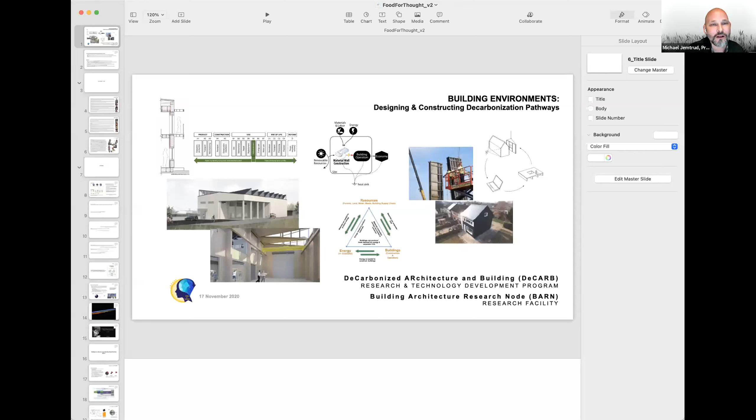Everyone hear me? Good. So I'll just start the screen share, I guess, right away. There we are. So is that good? Everyone see that? Looks good. Yeah.

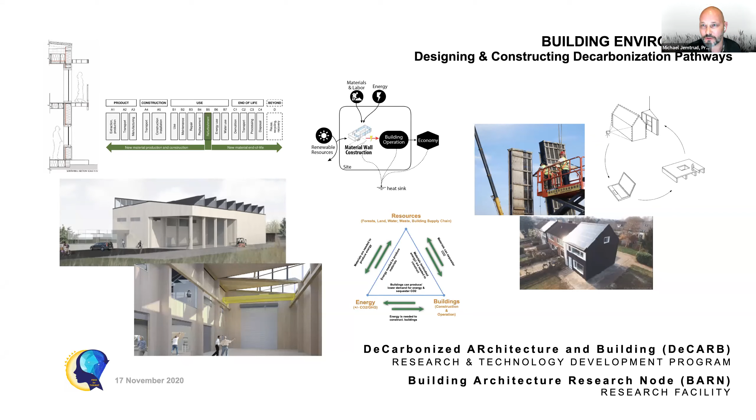Excuse me. Well, thank you. This is really a pleasure, crossing faculty, something I've been looking forward to for a very long time. I'm in the School of Architecture, which is in the Faculty of Engineering. I've been working with Grant now for about a year, trying to set up some tangible research projects and initiatives out at the MAC campus, some of which I'll talk about tonight. So let's just get right into it.

What I am going to talk about tonight is three intertwined initiatives. There's the DeCARB research program, which is the blanket research program we have within the School of Architecture now, involving quite a few faculty members that I'll show later. It's housed in the School of Architecture, but it's meant to be interfaculty, interinstitutional, and involve quite a lot of industry partners as well.

The second related theme, which falls within the DeCARB program, is the Quebec Building Energy Retrofit program, a research program that I'm applying for right now. It started as a Hydro-Quebec Industry Research Chair proposal, but since the granting programs have changed quite a bit, it's taken a new twist. I'm still working on that, but I hope to submit it by the end of the term.

The third initiative, which ties into all of this, is a large CFI grant, Canadian Foundation for Innovation grant, to build a new building out at MAC campus called the Building Architecture Research Node, which I will speak about. Collectively, the big question for all of us is trying to have a holistic consideration of the global warming potential of the entire building environments process.

I say building environments process instead of architecture or engineering because it's a verb and a noun. So it is about buildings, of course, but it's also the entire process that we go through to build a building, a community, a landscape, or anything that involves the built world.

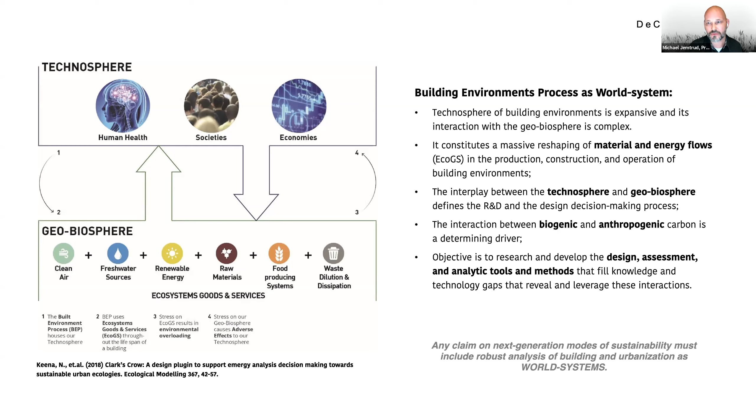Like I said, we have a great interest in wood and biogenic carbon related systems and issues, but it's not only limited to that. So it's an interdisciplinary and transcalar approach. We have people from Elena Bennett looking at huge ecosystem services, and Rosetta Elkin looking at coastal resilience strategies, and Nick Luca looking at communities, all the way down to Sal looking at very specific building techniques and technologies. And we're really trying to fill the knowledge and technology gaps that we see in the architectural engineering construction industry.

One of the big points is that we've recognized all the different levels of uneven exchange, whether it be ecological, economic, or even in the metabolic rifts in the systems. And again, as I said before, we're very concerned about how a lot of these issues are routinely externalized in the research and design of buildings and urbanization. These enabling externalizations are directly responsible for a lot of environmental and social degradations around the world. I'll speak a bit about that later. So we're looking to expand our typical disciplinary system boundary as well into other disciplines, into other areas and at much larger scales.

I already said that we're looking to develop the kind of technologies and knowledge, epistemological structures around the gaps that we see in the industry. So it's all about this sort of interaction between resources, energy, and building, and that it's always a bi-directional flow of these things, and they get intertwined in very complex ways. But we truly do believe that Canada, and particularly Quebec, is poised to achieve low to carbon negative modes of living if we can effectively integrate this range of necessary flow systems and carbon cycles.

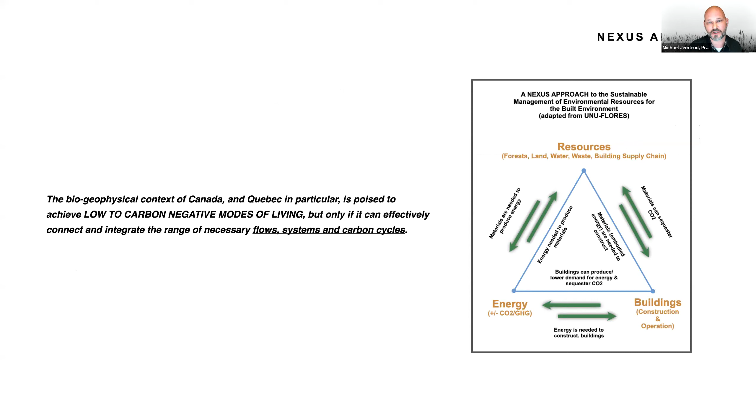One example of that, for instance, is the global warming potential of some of the greenhouse gases that we're talking about. So this one in particular, sulfur hexafluoride, has a global warming potential of 22,800 times greater than carbon dioxide.

So this is a component, a man-made component used a lot in electrical insulators for substations and semiconductors and such. As I work a lot with Hydro-Quebec, and as we in Quebec electrify everything, we think this is a great thing, but there's a lot of negative feedback loops that come with that. One of the main ones is that this compound is hugely damaging to the atmosphere. The more we electrify, we might be saving carbon equivalents on certain levels, but this one is really exacerbating another level of that.

Other examples we see in our own supply chain, for instance, is sand. There's a global crisis in sand right now, and that has to do with concrete. For instance, China used more concrete in the first 3 years of this century than the United States did in the entire 20th century. So there's literally a sand shortage. There's a mafia around sand, and people are dying because of it. The sea around North Korea is having huge degradation problems.

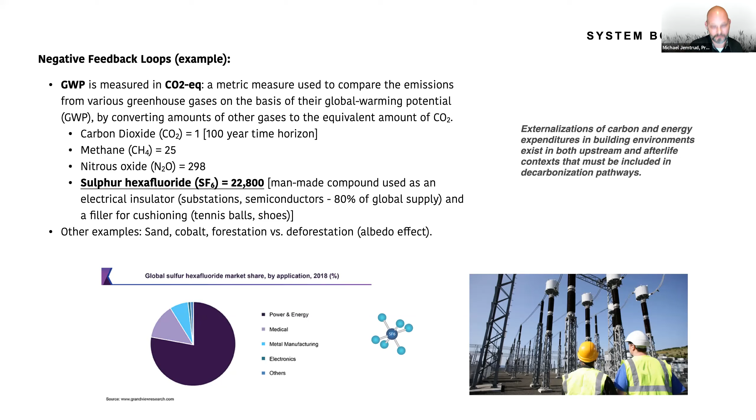So what we're really talking about is this very thin layer of the atmosphere around the Earth that we have to locate architecture in. And it reminds me of a saying from my favorite artist, Tom Waits, when he was inducted into the Rock and Roll Hall of Fame. He said songs are really just very interesting things to be doing with air. So I've kind of taken that to heart, and buildings are really just a very interesting thing to be doing with air.

I think it's an important mental shift to make for our students, for the profession at large, that although it's very concrete, we're dealing with social issues and things like that, there's these externalized effects that we have to be more aware of. And we need to have that kind of mental paradigm shift in order to think that way. So I'm going to go through this next section a little quicker because I think this is probably familiar to a lot of people.

We're really looking at carbon critical building environment process solutions. As you probably know, architecture, or buildings, are responsible for a huge amount of global emissions, and that's operational emissions. But even more importantly, as we get better with energy efficiency and electrification, particularly in Quebec because we have hydroelectric power, the embodied emissions in a building and in the whole process is even more important. A typical building actually over its lifetime has more embodied carbon and energy emissions than it does operational ones.

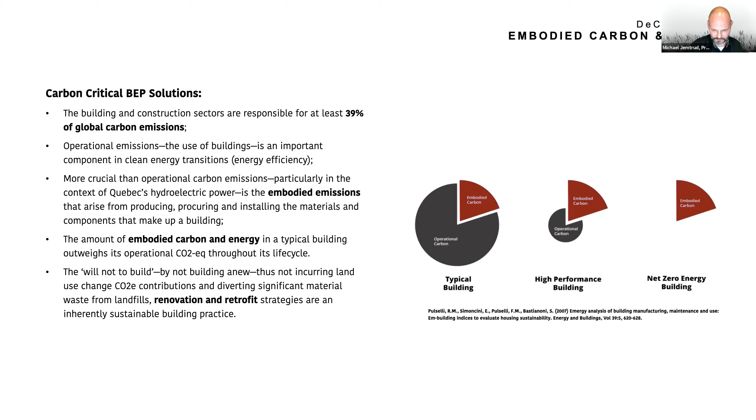So how do we expand the system boundary? Well, this is a typical life cycle analysis kind of diagram. My colleagues like Naomi Keena and Sal and Kiel Moe have developed some techniques and methods that actually expand that system boundary and look at the actual work of the geobiosphere. So through emergy analysis, they understand how much energy it took to grow a tree. And then it goes all the way to the other end, where it's looking at capital and human resource expenditures and energies.

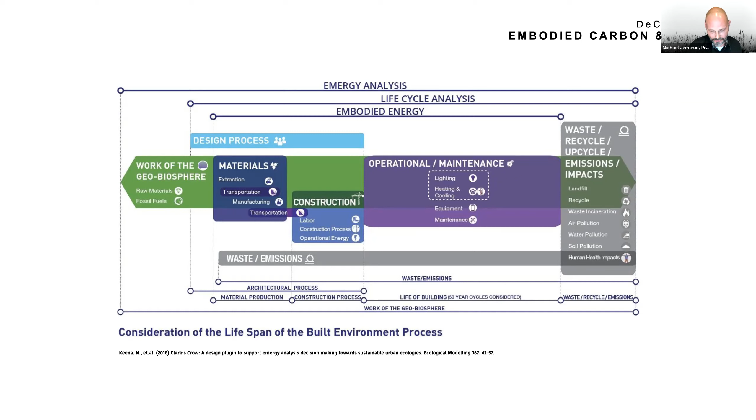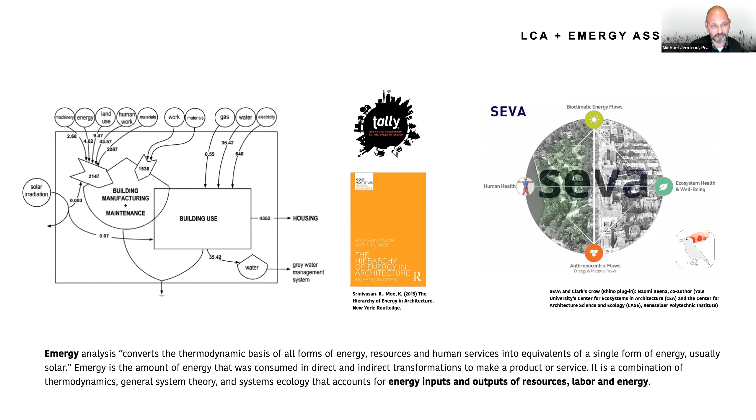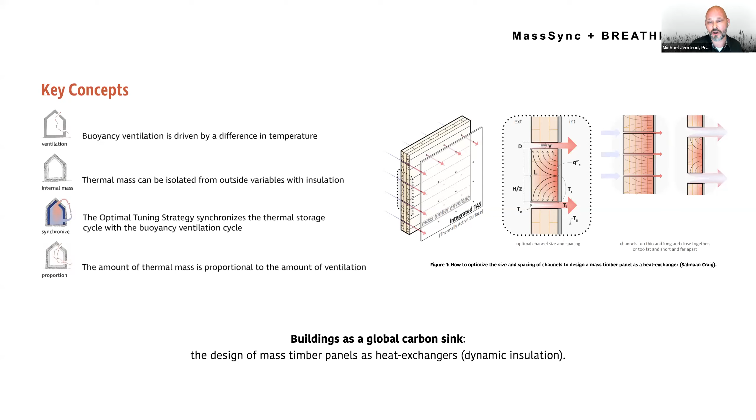Salmaan Craig, amazing engineer, crossover engineer to architecture, which is actually quite rare. He's working on all wood constructions, along with tuning that with passive ventilation techniques. He's found a way to use all wood wall construction to behave at passive house levels of performance, really high performance enclosures, but they're all wood assemblies. So there's none of the other membranes and things with high carbon content. He's doing this with something that sequesters carbon instead, so he's looking at buildings as a global carbon sink, which would be a complete game changer in the industry.

I show this because we're actually prototyping some of his technologies at a collaborating institution, Auburn University. They have a group called the Rural Studio, one of the longest standing design build programs in the world and probably the best known. They're prototyping these things for us right now because we don't have the capacity here, but I'll get to that because we're trying to change that.

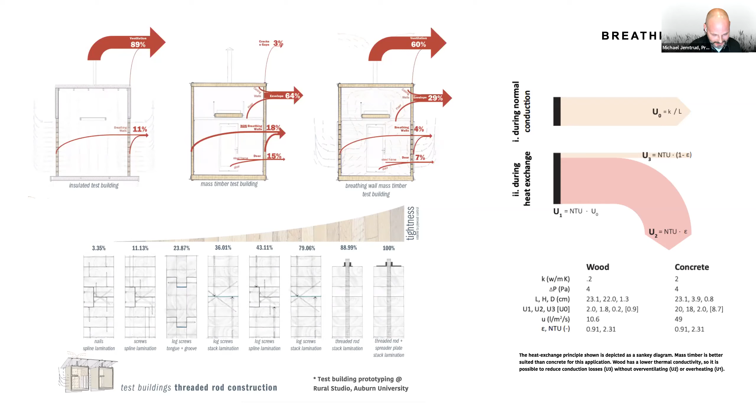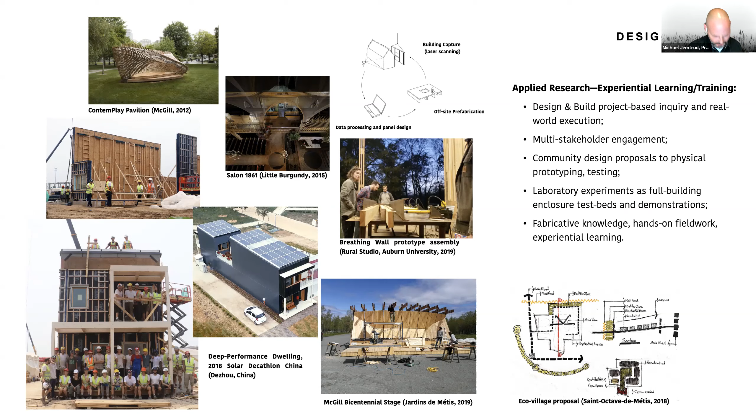And then of course there's the design build stuff where we actually prototype and build buildings to prove our ideas and techniques, and integrate the technologies we're developing in the building itself, but also in the design tools we're developing, which I think is even more important. The images on the left are the building we built in China in 22 days, which was insane, and I'll never do that again.

And then there's the Quebec Chair in Building Environments, which, as I said before, started off as a Hydro-Quebec research chair. But it's also now got the Transition Énergétique Québec people supporting it at the equal level of Hydro-Quebec, and there's some industry partners as well.

It's a 5-year research program, renewable, but the first 5 years we're focusing on building energy retrofit, and that's kind of my thing right now, my main focus.

The goal is to develop a Quebec building energy retrofit platform that we can actually roll out. The time is urgent and we really need to make this happen. So we're working closely with all the governmental people who would be responsible for administering, incentivizing, and subsidizing such a program. Our role is more about building the tools around this that would make it possible.

You need upfront evaluation tools to find the right buildings to do, and to calculate baseline carbon levels in an existing building, because in the end it's always a lot more sustainable not to build. I know that sounds funny coming from an architect, but renovation and keeping buildings is the best way to move forward. Within that, we're also developing co-design processes with inhabitants, owners and operators, as well as technical solutions for prefabricated panelized systems and active systems.

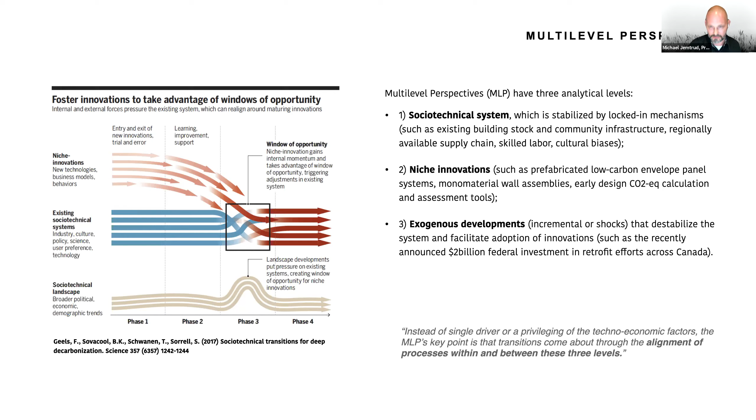The other part of this is that these deep energy retrofits, as I'm calling them, are proven to create a much more resilient community. The buildings themselves are much more resilient. They can take extreme weather events better, and they're definitely healthier indoor environments. And that's a really key part, because that's come to light with the pandemic for sure, that the air quality measures need to be addressed.

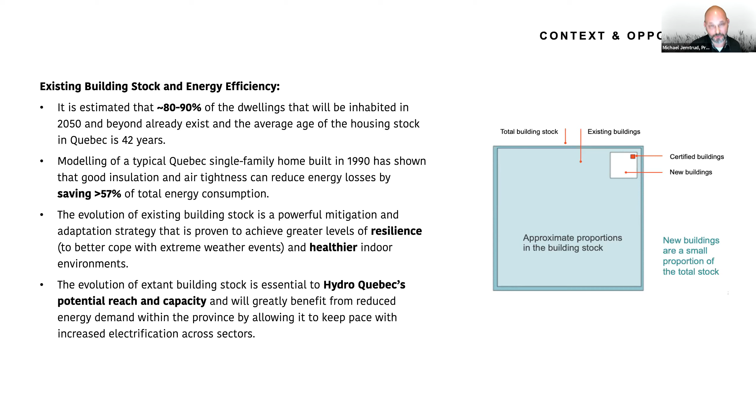And then thirdly, because of, well, Hydro-Quebec - I've been working with Hydro-Quebec for a while - they need us to be more energy efficient in Quebec if they're going to keep pace with the electrification of the province, as well as to continue to sell energy to New York for a lot more than we pay for it.

So basically, a deep energy retrofit is wrapping an existing building in a new skin, and then upgrading its mechanical and active systems, all of them. It could be your lighting too, etc. And as I said before, for me, one of the main non-energy benefits is the health and well-being, the increase in healthier indoor environments and the well-being of the occupants. But these are proven to be able to reduce energy demand by 75-90%.

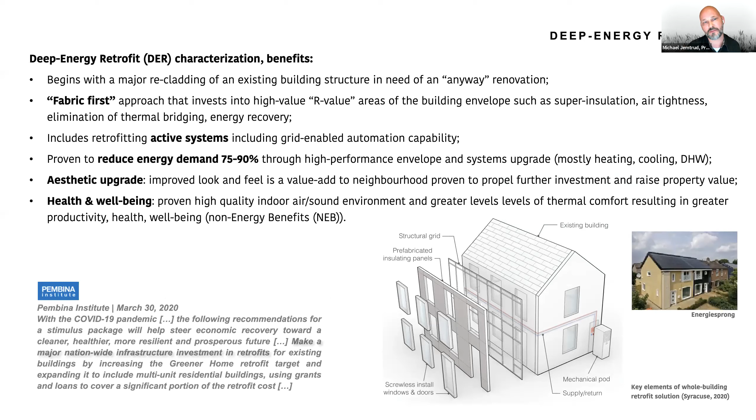There's a lot of things you have to do to make these things work, but the main point of this slide is that Europe's been doing this now for a long time, about 15 years aggressively. And what they've discovered is there is no silver bullet here. You have to design each solution for the region, for the province. If it's Belgium, it's not a problem. If it's the Netherlands, not a problem - it's very small. But here we have to make it very specific to the region.

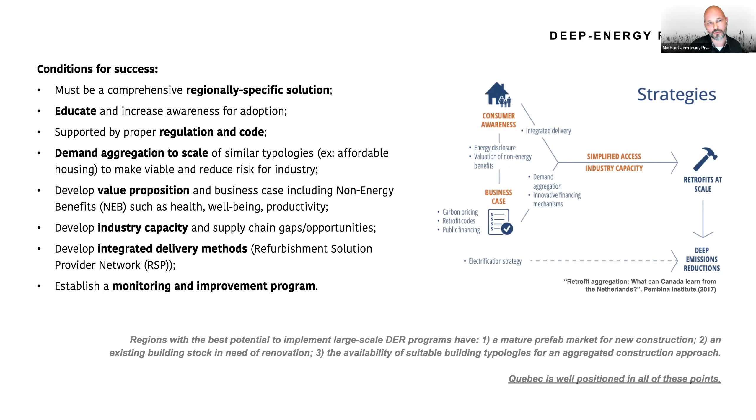The other part of this is that you have to have the right building stock. In other words, you need to have a building stock that can be aggregated at a certain scale, so it makes it cost effective for the industry people to do it. They can't obviously lose money on it, and the government is not going to either. It always requires some public sector money, but it has to be just a little bit to mitigate risk, and you have to lower the risk by aggregating buildings together.

And then prefabrication is really important to this, because these panels, these systems are typically prefabricated in a factory. This is probably our biggest gap right now in Quebec. Although we have a very large prefabrication industry, they don't have the skill sets nor the desire really to do high performance construction, and no one really knows how to do the deep energy retrofit thing yet. But we're working with quite a few companies to expand their capacity.

There's a whole bunch of benefits to prefabrication, but for me, one of the biggest ones is the fact that it can address our skilled labor shortage, which is serious here in Quebec. We're just not getting people going into the trades anymore.

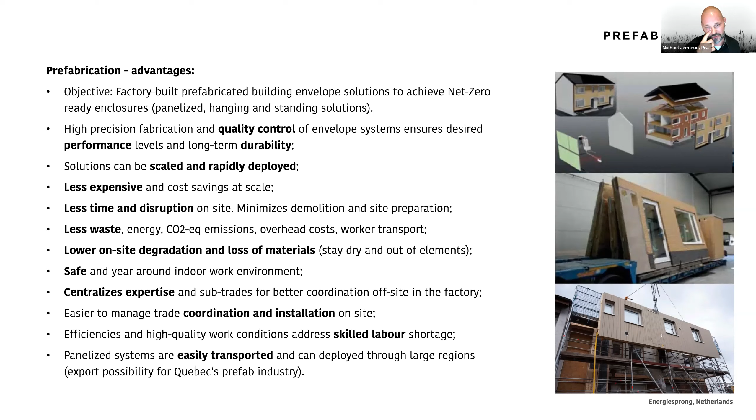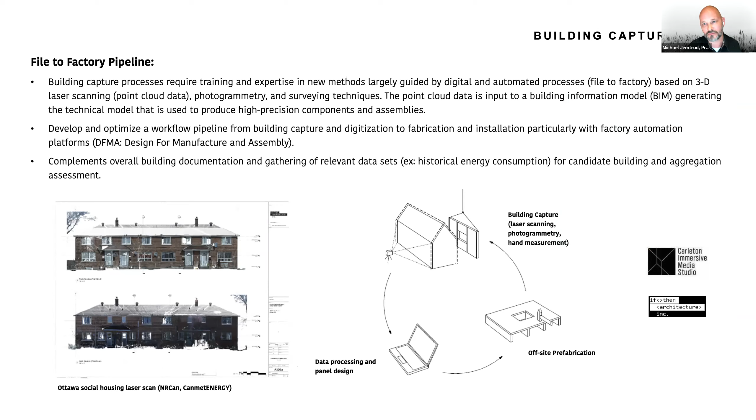Part of this process is a digital process where you have to laser scan a building. You have to record the building very precisely in order for the panels to fit basically to where all the windows and doors are. So this is typically one of the big barriers to adopting these strategies. This is something I used to do quite a bit at my old lab in Ottawa, and we're working with them again to streamline this process.

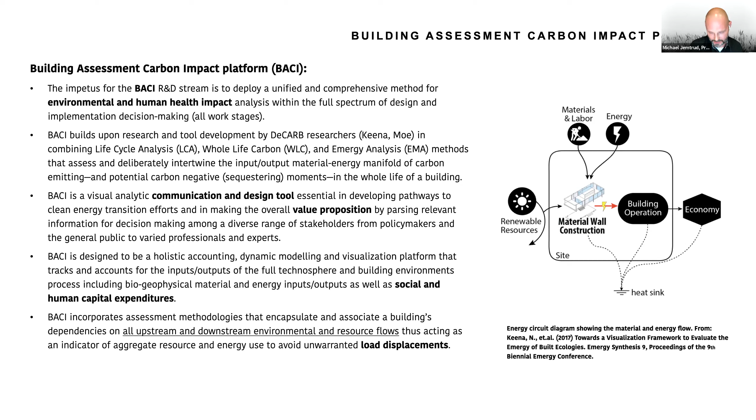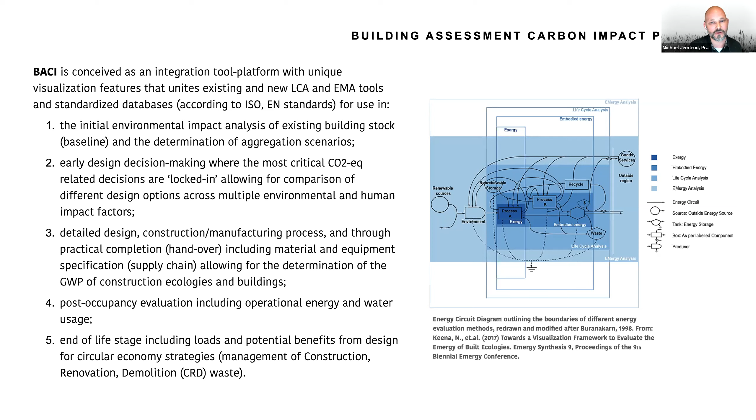I just went through this, but the tool is also meant to go through the detailed design and construction manufacturing process. So it's a supply chain issue too, not just an architecture design issue. And it has to be used at the end of life stage—when you're renovating, demolishing, or disposing of a building, these things have to be accounted for in terms of the overall global warming potential of a building.

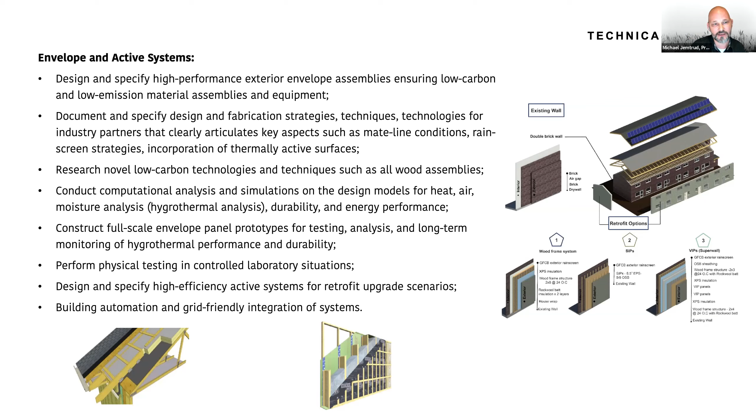The envelope systems, a lot of them are pretty standardized, but our main interest is to develop a truly low carbon solution, because right now a lot of the solutions in Europe and even here in North America use materials that are very high carbon content—some rigid insulations, water barriers, and things like that. We want to find solutions that are not so high in carbon.

Now, our main client in this research program is Société d'Habitation du Québec. The affordable housing and social housing agencies are typically good people to go to for these kinds of initiatives, because they're usually owner operators.

SHQ spends over $100 million a year just in energy costs. They have a $1.6 billion renovation budget, so they can do these things at scale. And often these kinds of social multi-unit residential buildings for social or affordable housing, or any housing in general, typically are kind of dumb boxes—I don't mean that in a bad way, because I like dumb boxes—so they're easier to do the renovation and retrofit of.

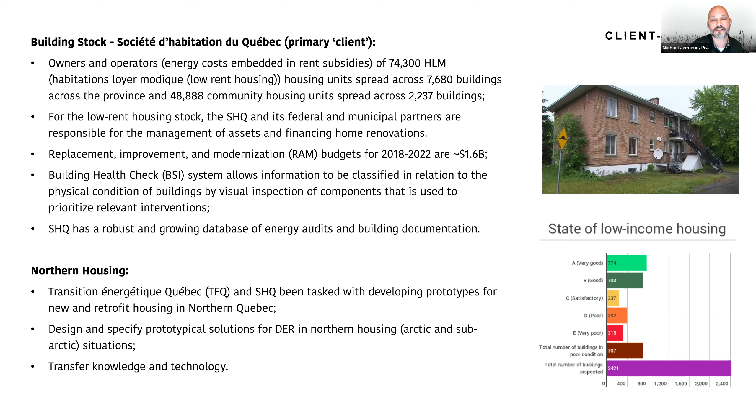The other part of this is that SHQ and Transition Énergétique Québec have a mandate to solve some of the northern housing problems, and the first task is the deep energy retrofit of the existing building stock.

And like I mentioned before, this is absolutely critical to Hydro-Québec, because their projections for inundation, flooding, water, energy usage, and the electrification of industry mean we're going to have issues if we don't start actually reducing our energy consumption, particularly at the urban level.

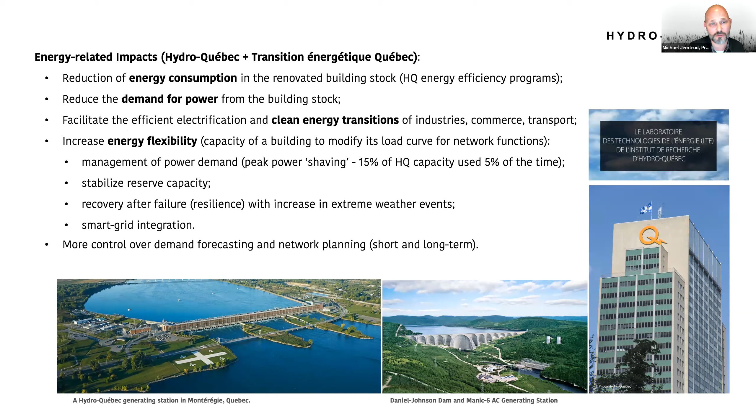These are some of the partners—that's kind of a diagram of the workflow. The main sponsoring partners are Hydro-Québec, TEQ, and some industry partners.

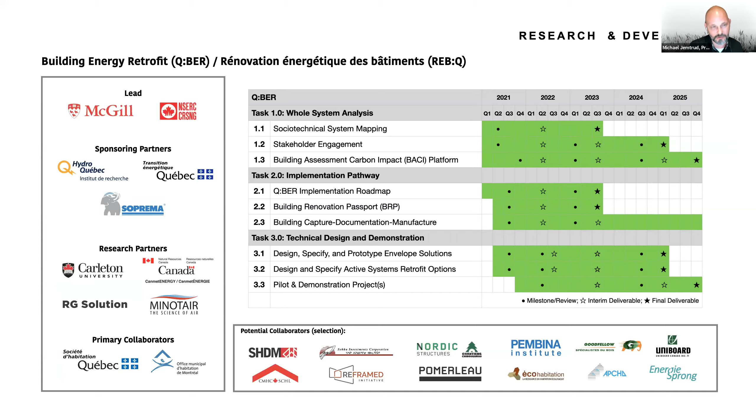Now, finally, I'm going to go through this quickly. This is the thing that Grant and I have been working on, and Benoit and Elena and a whole bunch of people. This is a Canada Foundation for Innovation grant for a new building out at the Mac campus, a research facility to do all the stuff I just talked about. You're going to see a lot of the same words I used before, because this kind of came—we put the cart before the horse in a way. Literally, the building came before the research programs in some cases.

We're expecting a decision on that this month, very soon. It's a $19.2 million building, which I think is a bit overpriced, but maybe not now in the current context, because costs have been going up a lot. It's basically a big shop where we can prototype and construct things at full scale, and it's got some wet labs in it for testing and other forms of research.

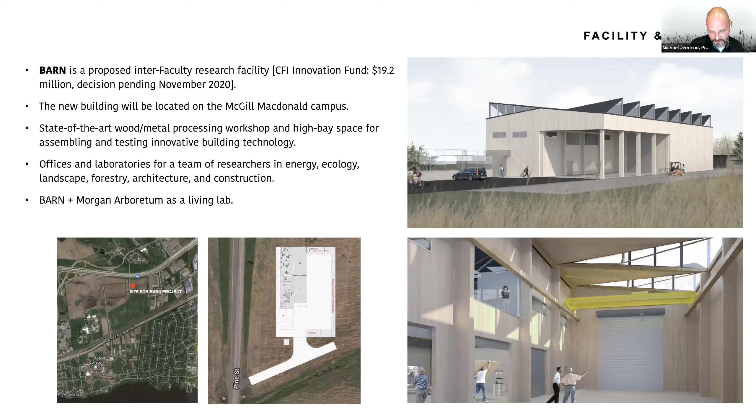It's hopefully going to be near the Morgan Arboretum, because the Morgan Arboretum is actually kind of a part of our living lab idea for being out at Mac campus.

And it's got the same workflow—research, you develop it, you demonstrate it, and you transfer the technology to industry, and you do that as fast as possible. I think that's where the demonstration and design-build approach is so important, because often things stay in the lab and don't get to industry until someone actually proves to them that it can be done or that it works. That's a critical part of our R&D workflow.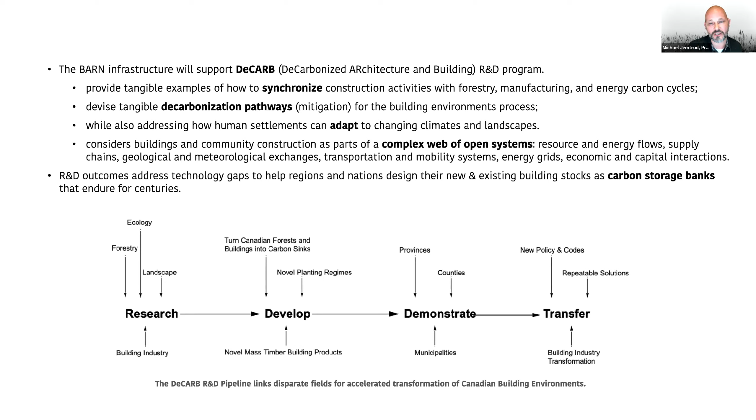And like I said before, we also need to get more involved with the code and policy and the policy-making aspects of this, but we're starting to make our own headway into that now.

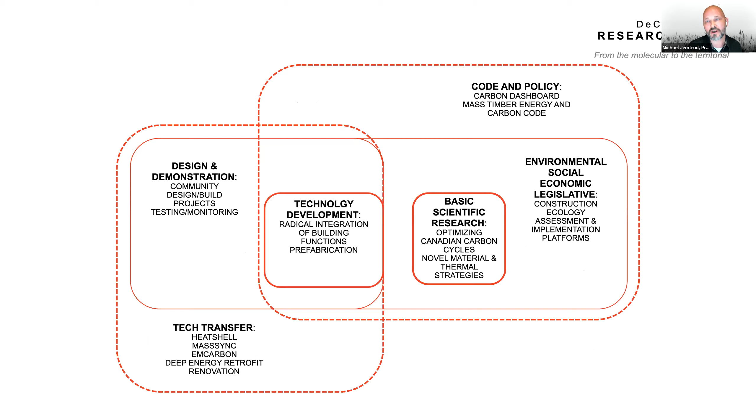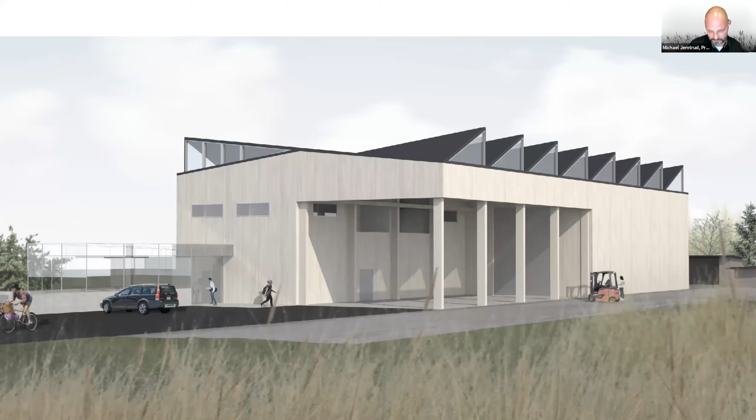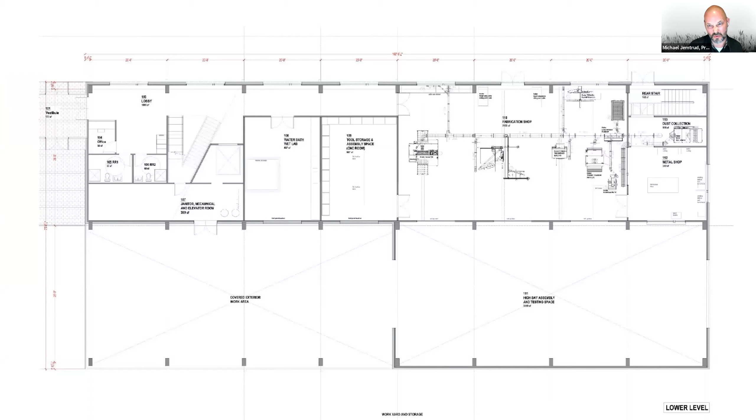And then you've got a really large high bay space where we can move things in and out of that semi-enclosed area outside to keep constructing things year round. A big metal and wood workshop. That's kind of the plan of it. It's a fairly large building, but it's economical on all the toys and stuff. It's nice because a lot of the equipment is going to last for 50, 60 years.

So yeah, that's my three initiatives that are all intertwined. I'd love to hear some questions if you have any.